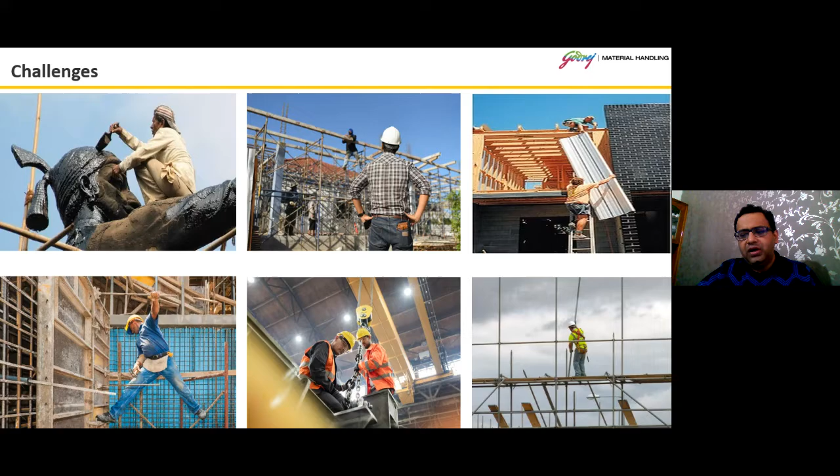People also use ladders, scaffoldings, and even material handling equipment to work at particular heights. Are ladders and scaffoldings safe? They are safe at particular heights, but they should be geared with particular safety guards when working at heights greater than 7 to 8 meters.

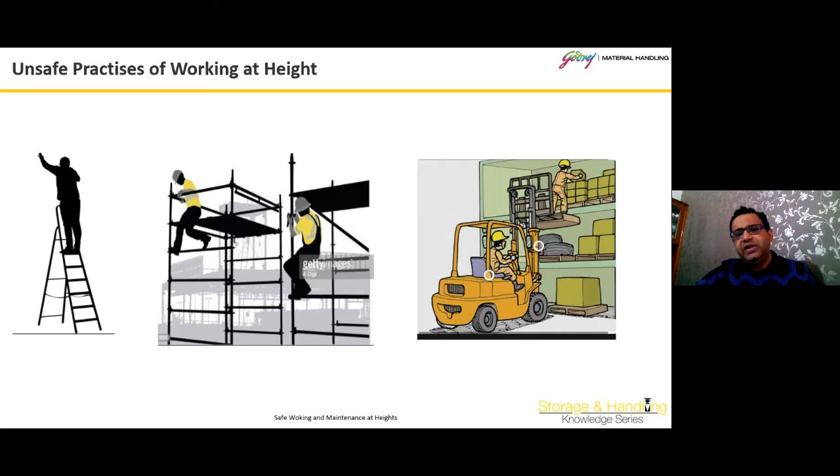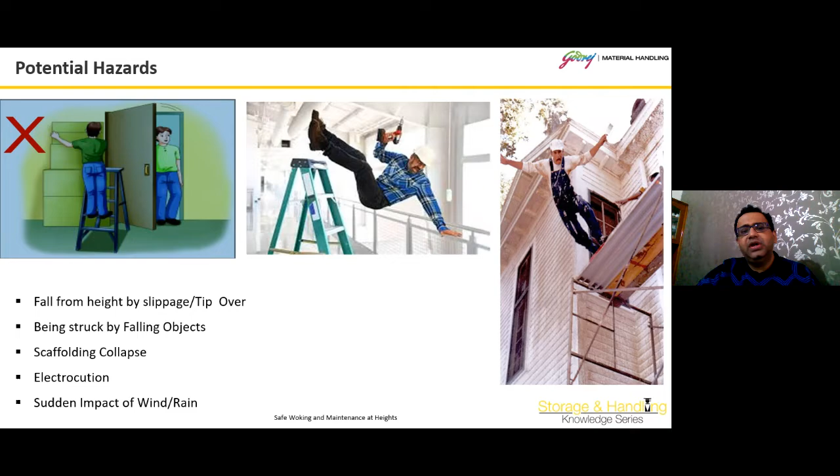What are the potential hazards? A ladder is safe, and scaffolding is also safe, but does it have potential hazards, and are there better ways of doing work at height? When working on a ladder, there is no control for the person working at that height, and similarly for scaffolding. There are chances, and it has happened, that people working on ladders or scaffoldings have fallen, or the scaffolding has collapsed, or there is slippage, because these don't have safety features ensuring the people working at those heights are safe.

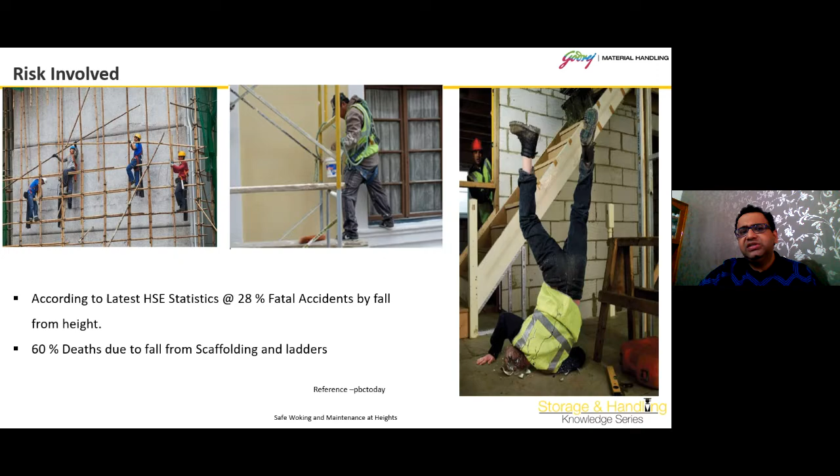There are many risks involved, and a global report says that 28% of fatal accidents happen when people are falling from heights, and most of them occur when working on ladders and scaffoldings. So though it's a very common visual to see people working on scaffoldings, there are much better ways to do the work at those heights.

As the material handling industry came on, people started moving loads at particular heights, and a lot of factories and warehouses are using material handling equipment. But material handling equipment is meant for handling material, not man. It is being used as a cage and people feel they are safe. I won't name companies, but even some of our own customers have used it and had very bad experiences, because material handling equipment is designed at a particular height with stability keeping center of gravity in mind. But when a person working at height moves in and around the cage, the stability of the truck comes at risk.

I'll run a short video to show what happens, shown in the right hand corner.

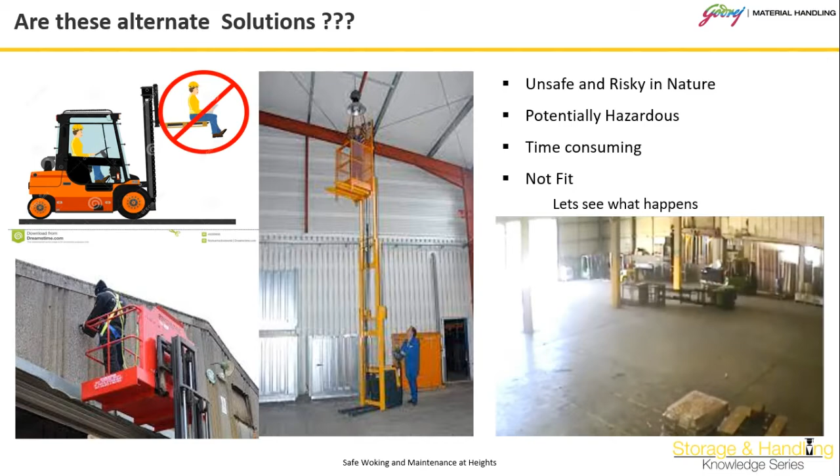This is a forklift truck. The balance, or center of gravity, got off because the speed at which the forklift was running is not recommended when working at height. Fortunately the person is saved, but it's a very risky proposition.

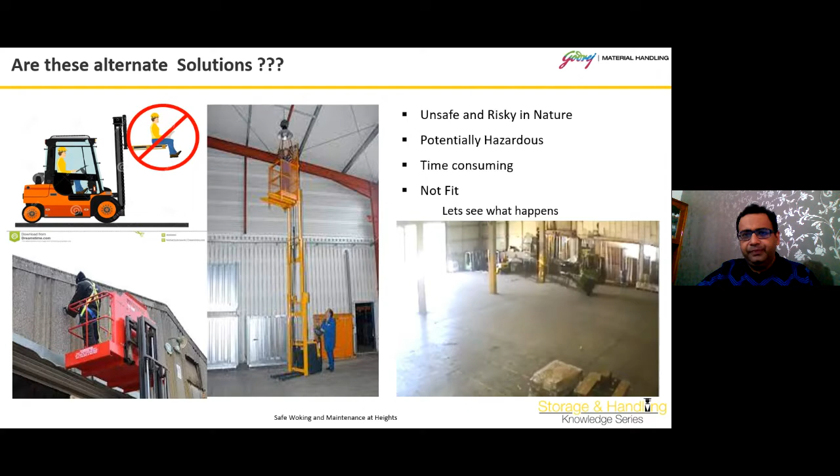So we should not use any material handling equipment while putting a person on top. Is there any alternative? We did one study, and I'll play a small video showing how traditional people work and what solution is available. The first video asks, is there any life without power tools?

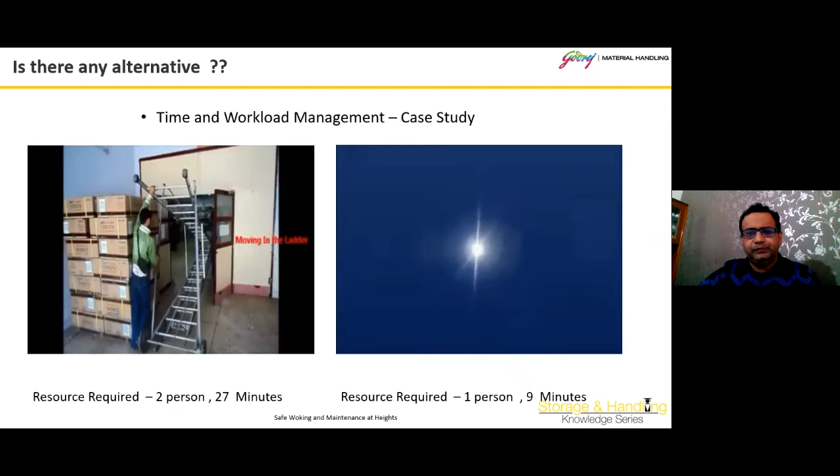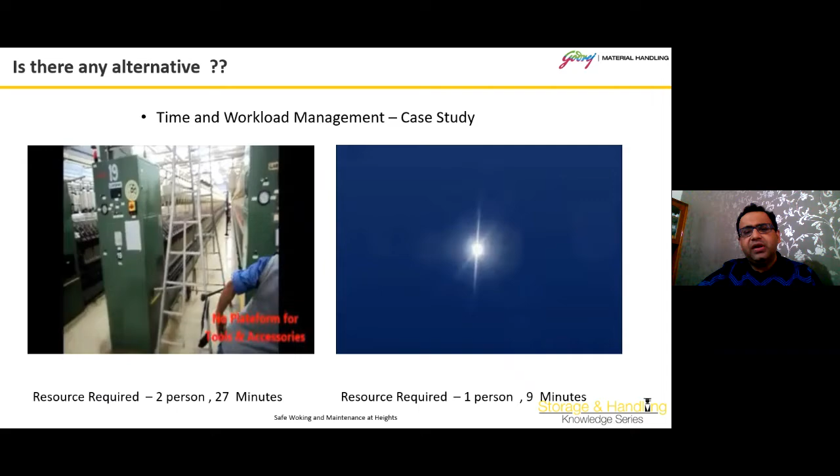This shows how people traditionally do the same work. You can see two people trying to put up a ladder, because the size of the ladder is fixed and the space is a constraint, and they are trying to change a tube light at the top.

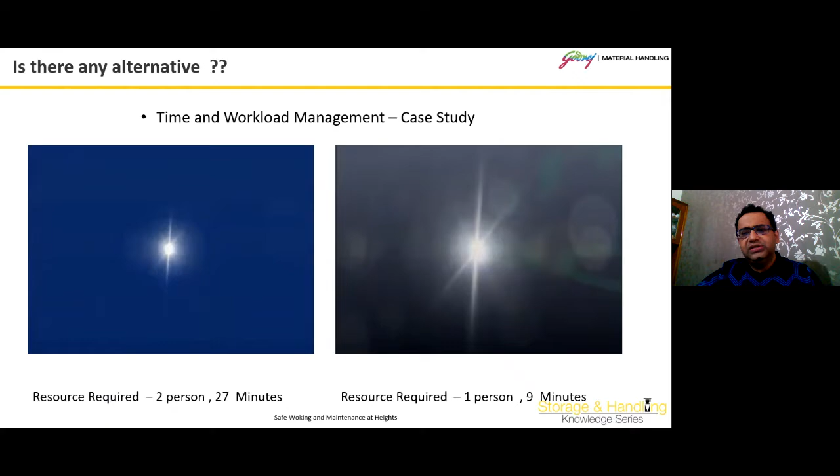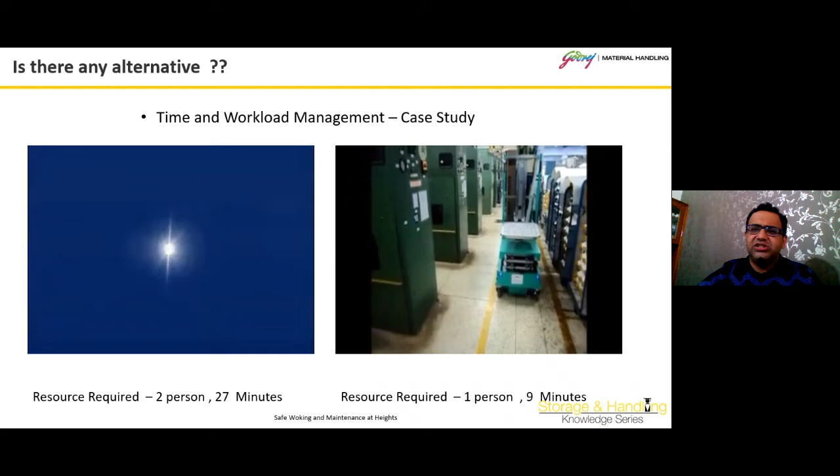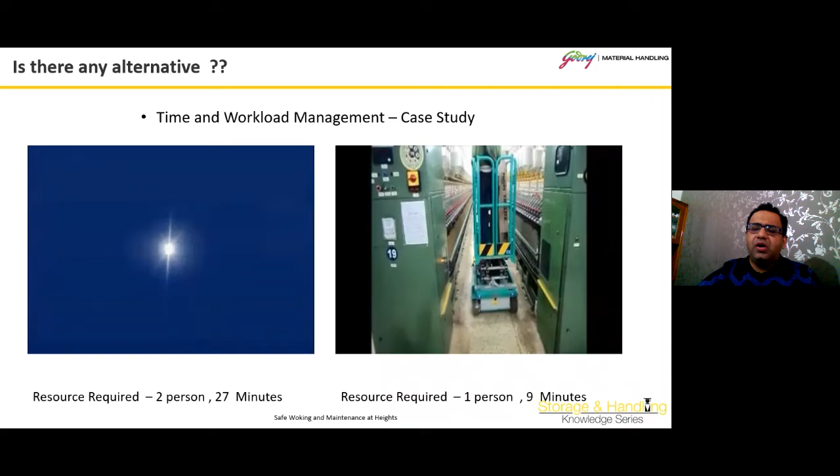Second, we have equipment doing the same job. Instead of two people, one person is working, and the time required is one-third, with full safety. You can see how small the aisle is, and they are still able to go to a particular height and do the work.

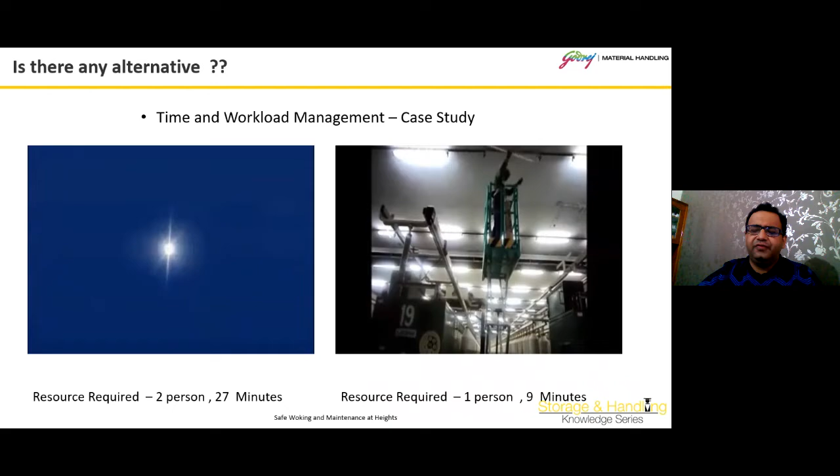This helps increase productivity with less manpower and increased safety at a factory location.

Going forward, we will talk about the different aerial work platforms. All this equipment is called aerial work platforms, some also called scissor lifts or boom lifts, but broadly classified as aerial work platforms. They come as mast, they can go up through scissors, and they're also classified as booms and as crawlers. Over this presentation, we'll go through, at a broad level, what these types of equipment are and what safety features are available.

First we talk about mast. It can come as a single mast or double mast.

Depending upon the mast, single or double, the capability of equipment taking one or two persons is available. It can be AC powered or battery operated. When you are moving up, either it is sourced through an AC socket or a battery fitted into the equipment, and it can go up to 16 meters. These are lightweight manual equipment, and you can transport from one location to another with the help of one or two people.

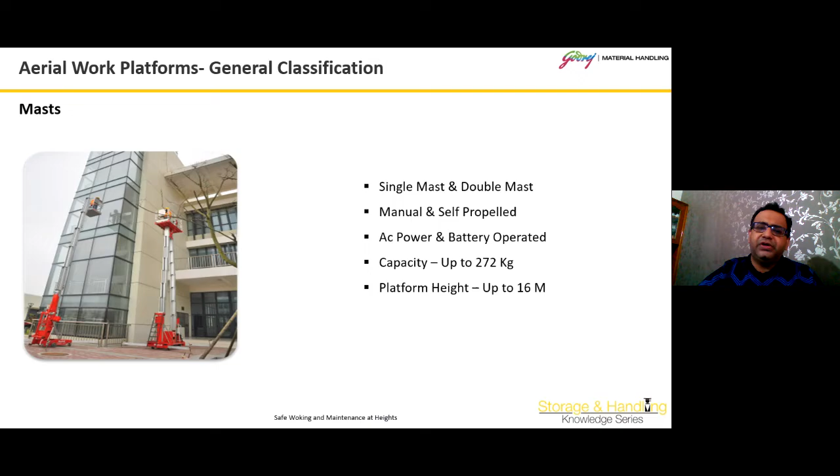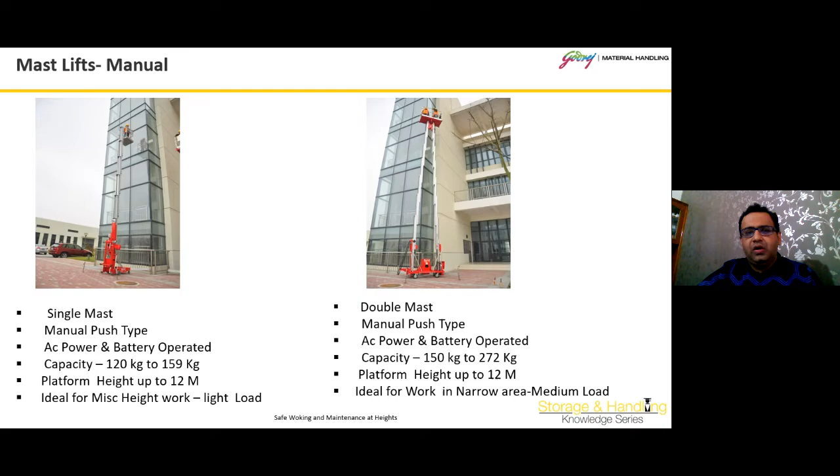This is the simplest form of aerial work platforms available. As I said, we have two types, single and double. The capacity varies because if you're taking two people, the machine should have capacity to take two people on top, plus these machines have outriggers to stabilize the machine at the platform. For these type of machines, you need a flat surface so the equipment can be stored such that when people are moving up, there is no movement on the machine. That's why it has outriggers on the four sides of the equipment.

You have an articulated boom as well as a straight boom. If the working height is at a place you can reach directly, people generally use either a mast or a scissor lift. But if there's a situation where you can't reach directly to the location, then we use an outreach or articulated boom in order to reach that particular height. These are the two self-propelled masts which come in this category.

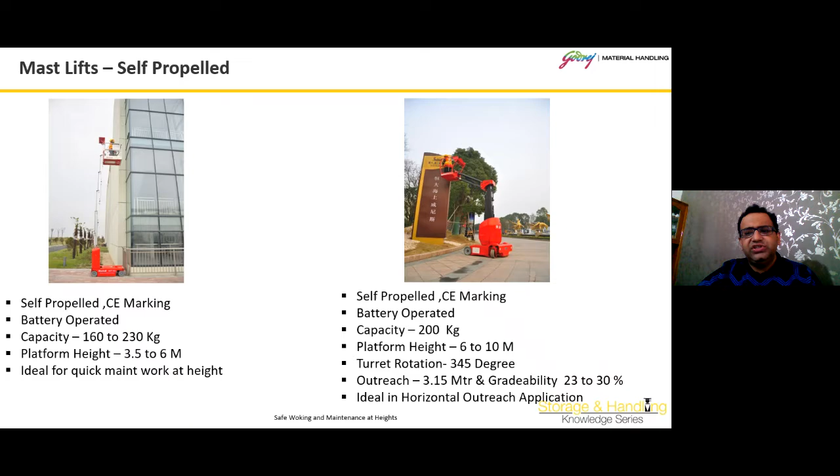Then comes the scissors. Scissors again are available manual and self-propelled, and the power to go on top is either through battery or AC power. These equipment work on flat surfaces, and are also available for construction sites with rough terrain capability. Depending upon the application, you have different heights and different capacities.

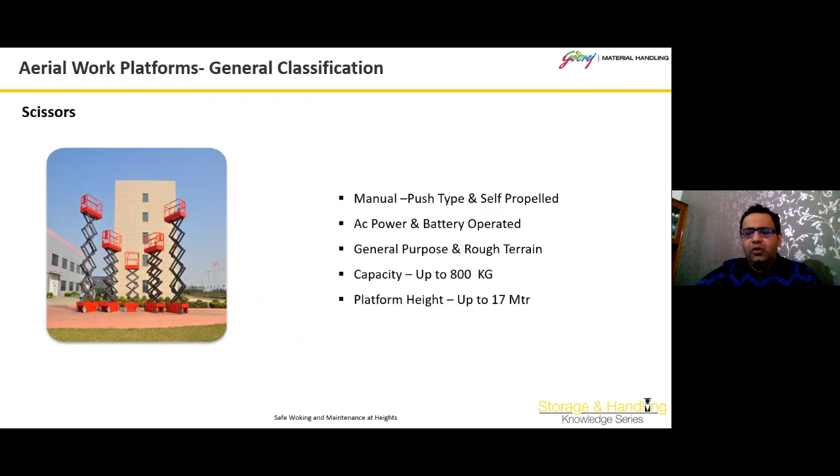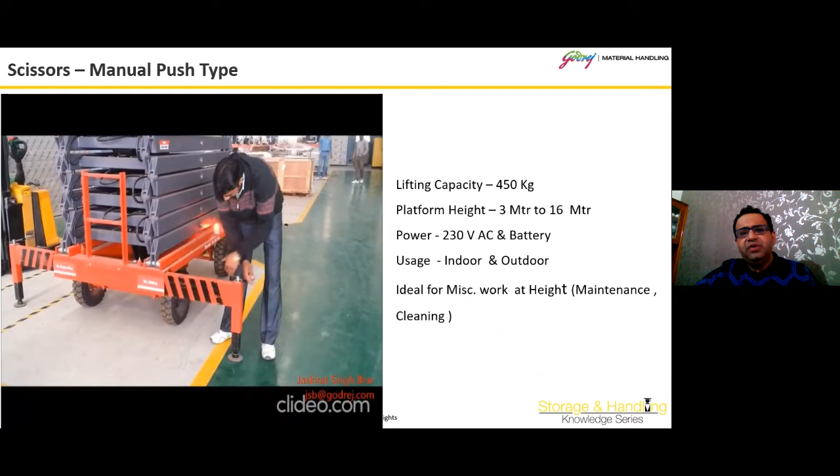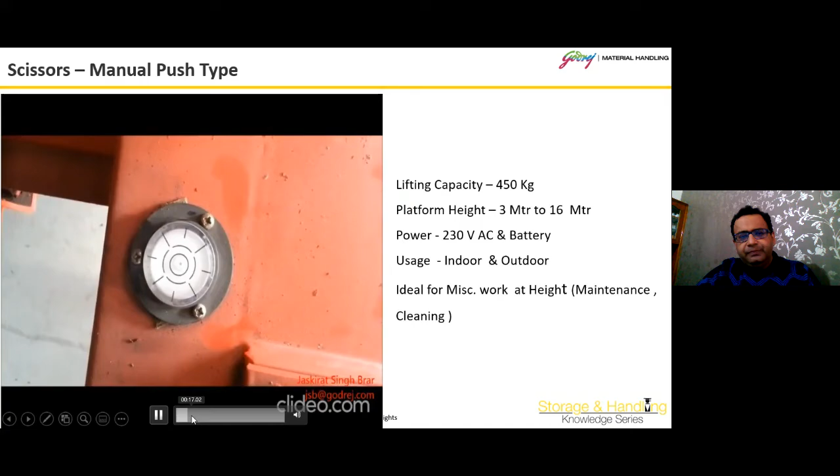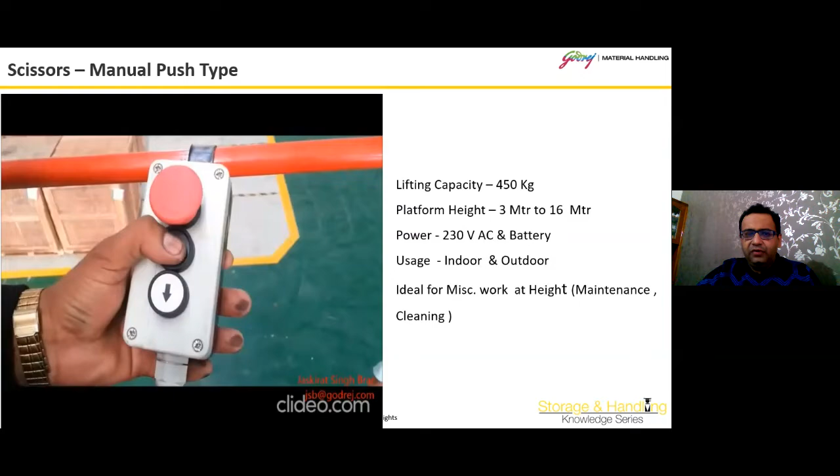In scissor lifts, as I mentioned, there's manual as well as battery operated machines. With a manual machine, you have outriggers. If you see in the video, the person is putting up the outriggers to stabilize the machine. Once done, he moves up. This is a level indicator showing the machine is stable, then it goes up. The controls of the machine are available with the operator in the basket, and in emergency it can be controlled from the machine on the downward side too. It has a simple drive of going up and going down.

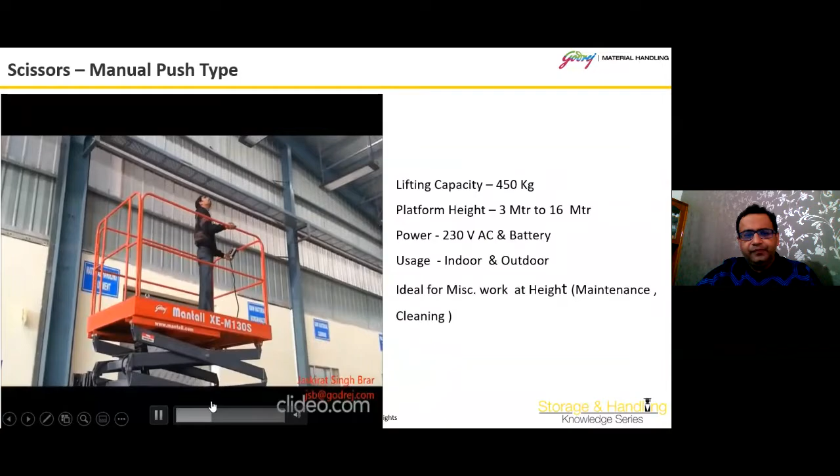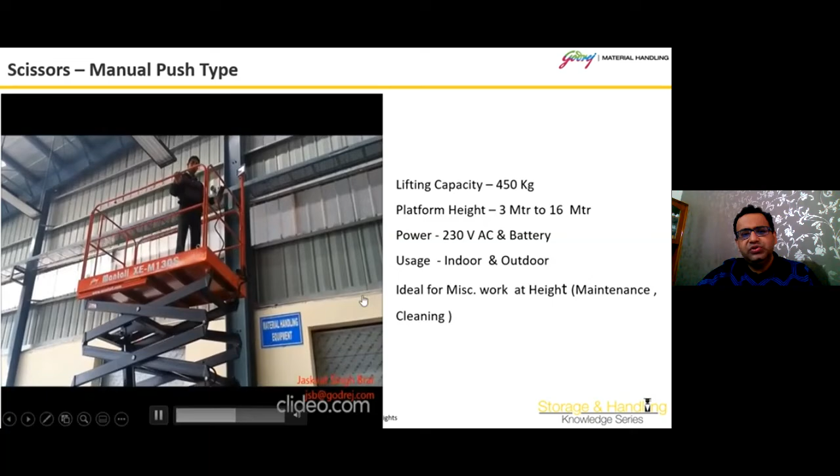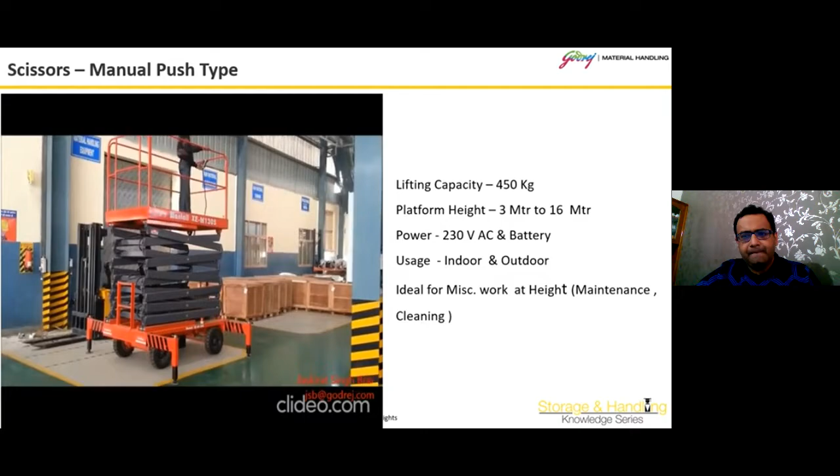You can see the movement of the scissors is very slow as it goes to the top. The control is in the hand of the person going up, and similarly he comes down by pressing a button on the downside. These machines can be used for cleaning and maintenance at workplaces.

Then there are self-propelled machines. Again, the height and capacities vary. Generally when someone buys a machine, it's assumed it can be used in internal as well as external environments, but that's not the case, because machines made for indoors have limited capacity to withstand winds. Machines meant for outdoor use have better resistance towards the winds. So one should be absolutely clear when purchasing the machine whether it's to be used for outdoor or indoor. There are certain machines basically meant for outdoor that can be used indoor as well as outdoor. These machines can be used for maintenance work, cleaning work, and even cycle counting in the warehouses.

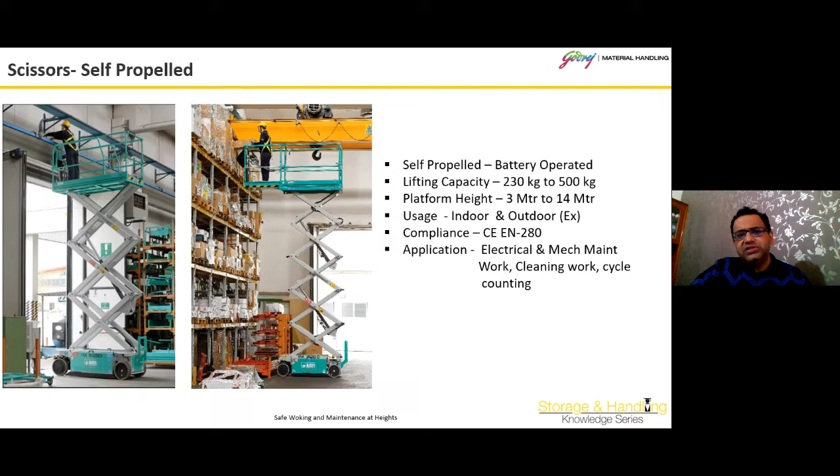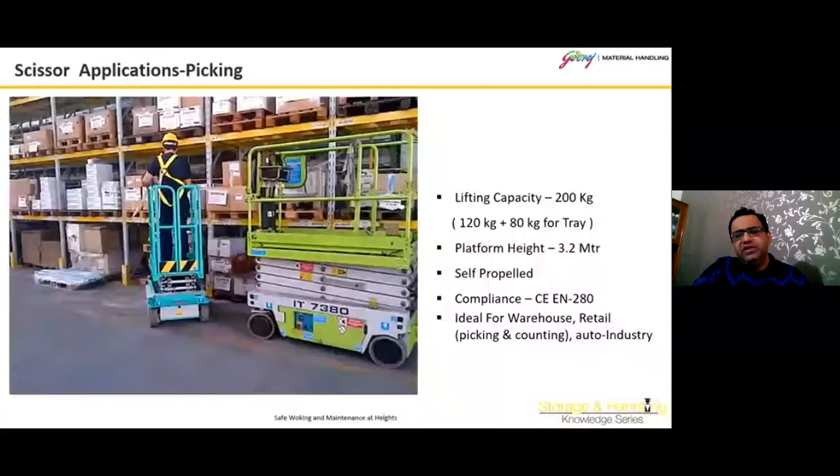In a similar category, there is a machine that can also be used for picking. You can see a small video of how this person in a spare parts division goes up on the machine, picking up the material from the rack, and putting it down.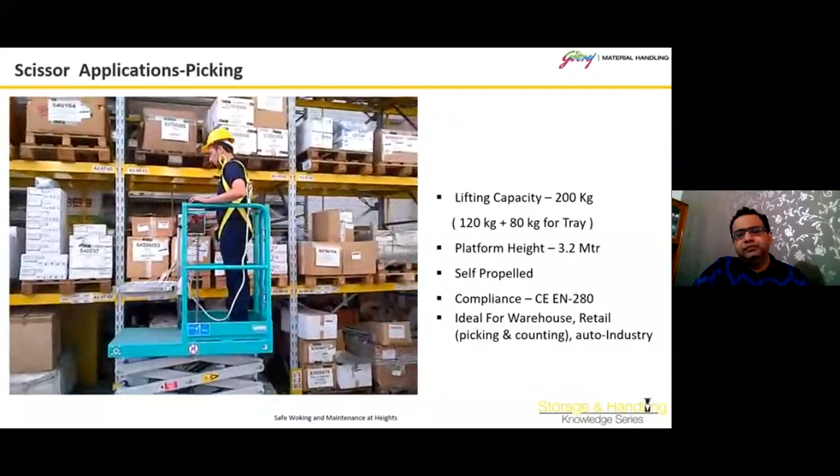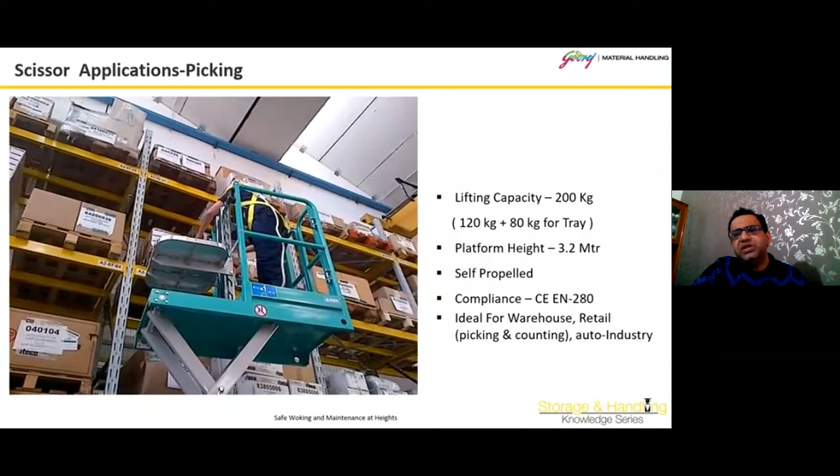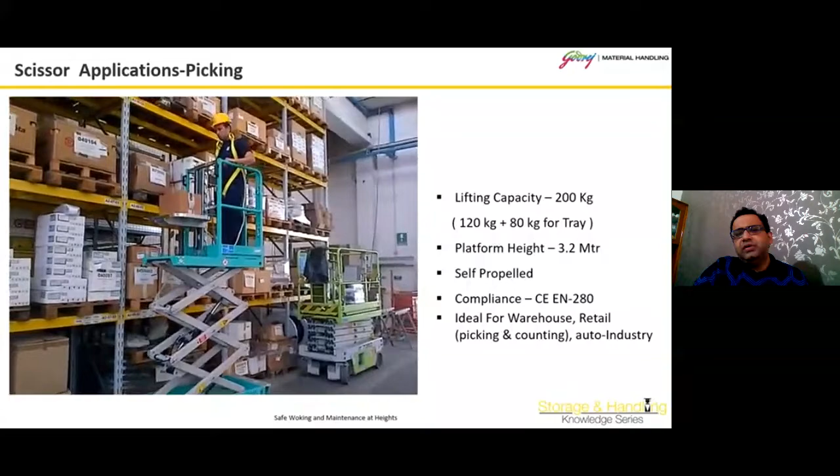So the capacity of this machine is about 200 kgs. Taking into consideration the weight of the person up to 120 kg, the tray is made for 80 kg. So this can be used as a multi-purpose machine for order picking, as well as for cycle counting, as well as for maintenance work.

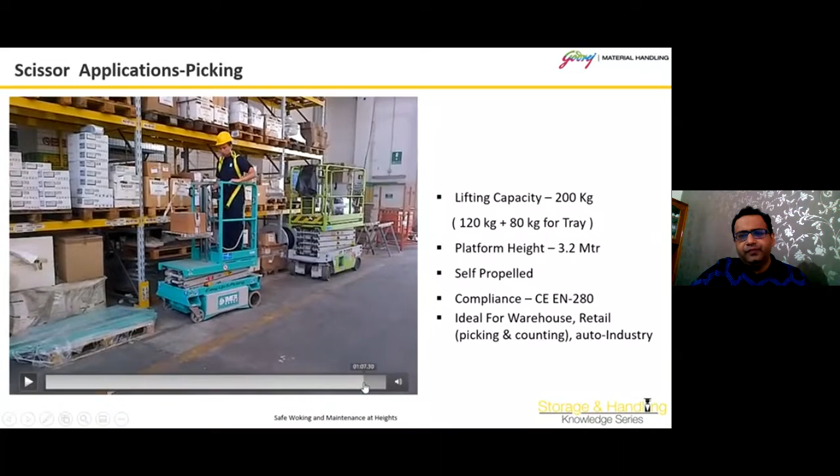So now this person is moving and he will put the material to the other rack. So now in the scissor application, what you have seen is that when the person is going on the top, he can move along the side of the machine.

But there are machines available where you can go parallel to the basket, which helps you to work in the warehouses, because in the warehouses it's not very convenient to have very long aisles where you can work along the length of the scissors. So this particular scissor lift helps you to work in very narrow aisles, and it can go up to 12 meters depending upon the width and the capacity required. So this is a very common application for warehouses.

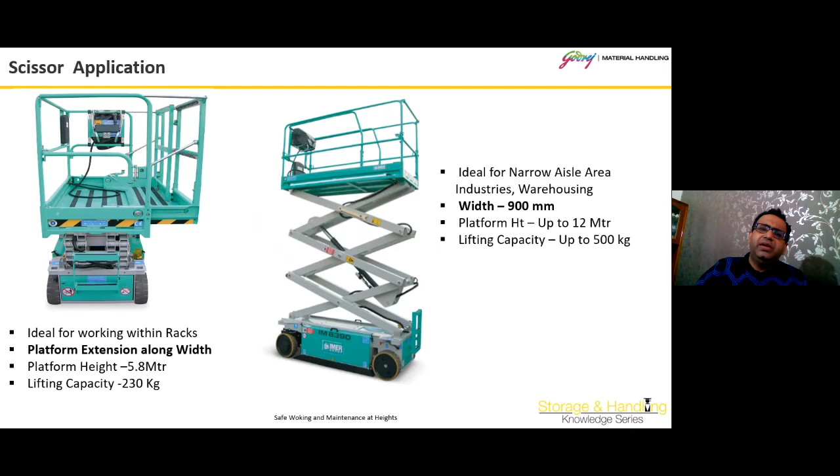Then you have rough terrain scissor applications which are used for construction sites. These machines have rough terrain capability, plus they have a high capacity up to 800 kgs, and they can be used from both the sides. The extension happens on both the sides for these machines, so that when you're working on a construction site, you don't want to move the machine again and again.

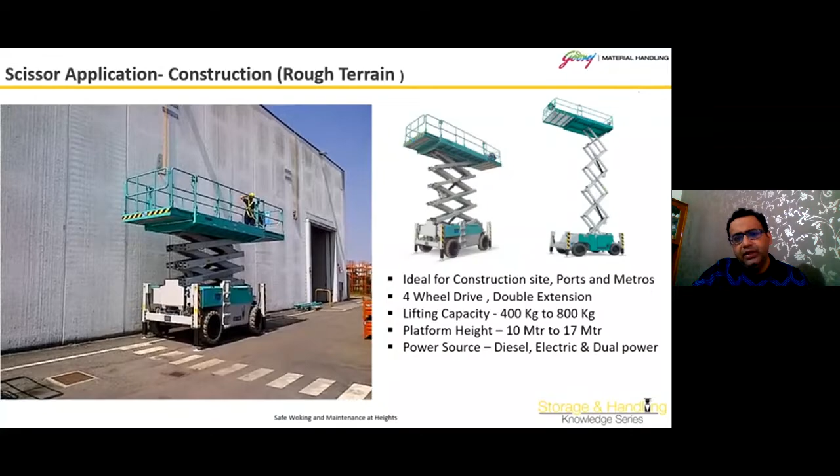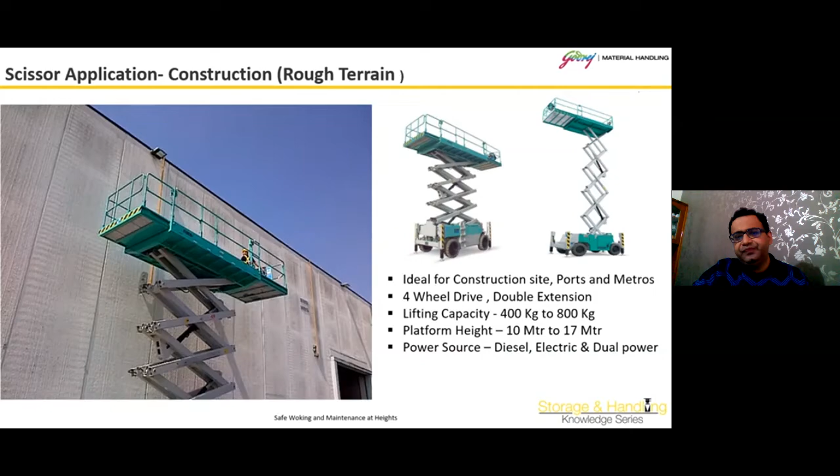So these are very rugged, strong machines, and as the video shows, it's working outside, and in the event if something happens, that gives enough time for a person to come down, and the machine will stop the work.

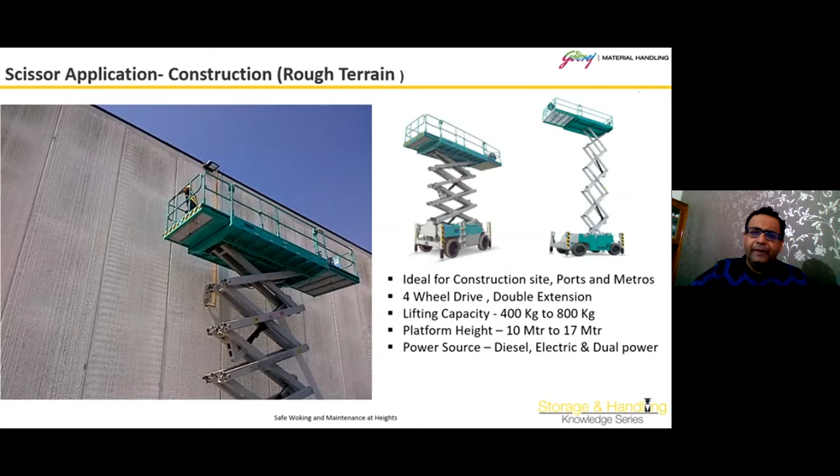Then from scissors, we are moving to boom lifts. Boom lifts are again divided into two types: one is an articulated boom lift, and the other is a telescopic boom lift. When we say telescopic boom lift, the boom comes from one location and moves directly towards its destination, so it's a single piece. But when we say articulated boom lift, it can articulate so that it requires less space in order to reach a particular location where a person needs to do the maintenance work.

Again, the controls of the machine are available with the operator who is working at a particular height, as well as in an emergency, if something happens, the basket can be brought down to the stored condition from the machine itself. If you see, it is available up to 40 meters, and it can carry one person or two persons for doing the job.

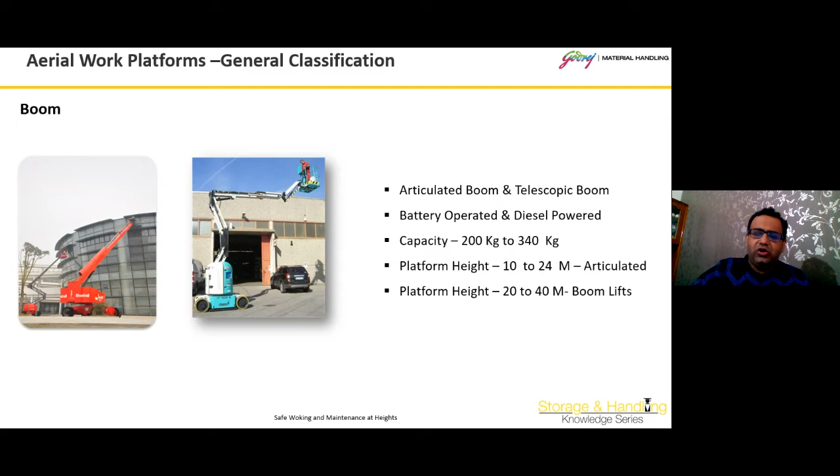Now in this particular machine, the reach is also very important, because you want to go to a particular height, plus you want to reach. So when there is any obstruction for doing maintenance work where the scissors can't go, this is the best option, to do maintenance work where you can't approach directly.

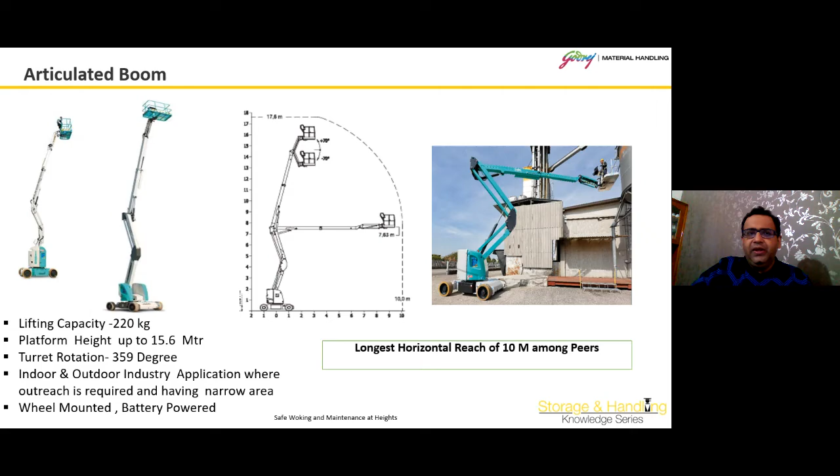And these turrets can rotate, and all the functionalities of the machine are in the hands of the operator. Even the basket, you can move plus and minus 70 degrees, and the level of the platform when you're operating always remains parallel, so that there is no adjustment required. So that is again a safety feature in this particular equipment, that you don't need to adjust your basket. It is done automatically.

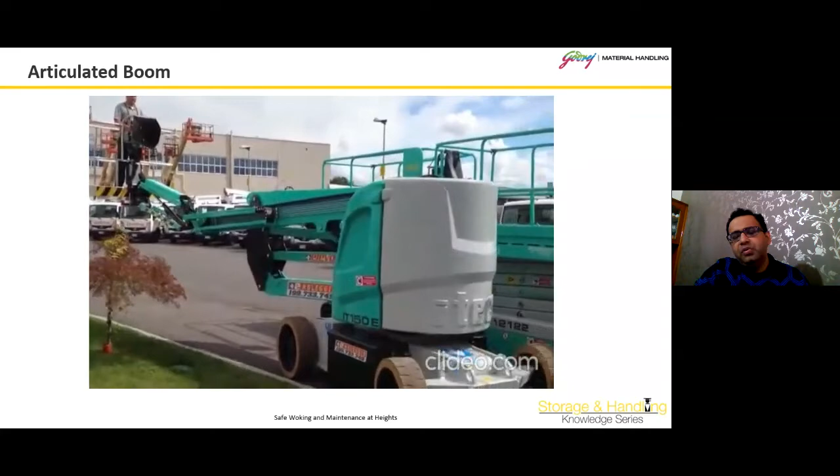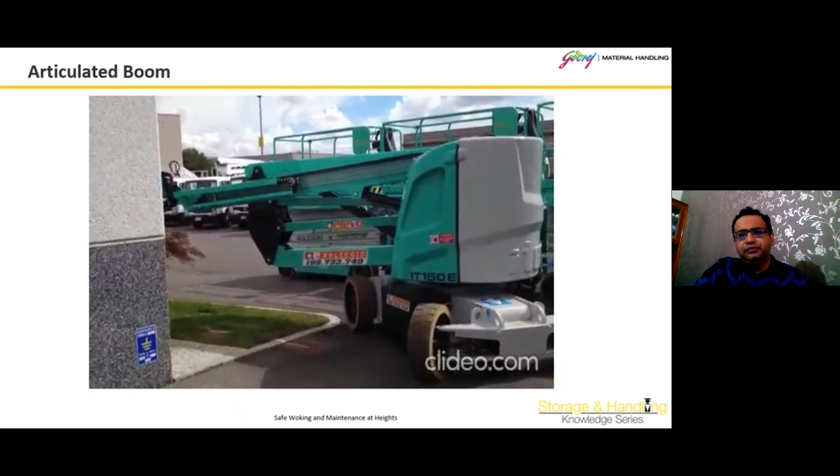So this is a small video. It will show how in a very compact space these machines can work and can go up to 18 meters in reach. So it can turn in a very tight radius.

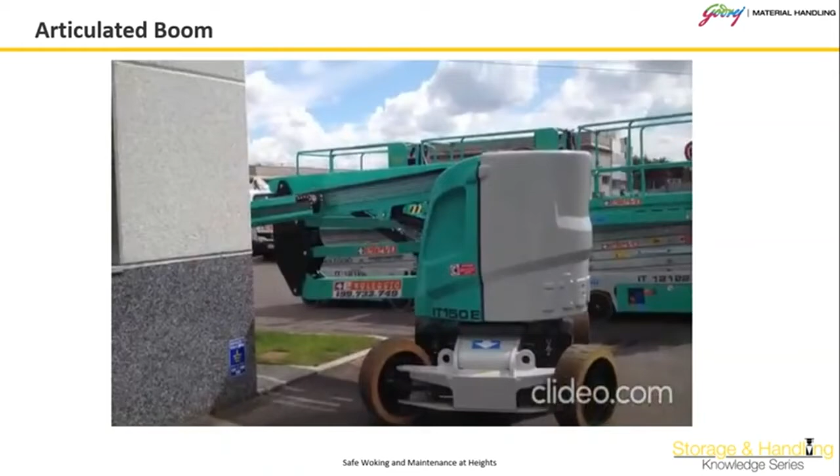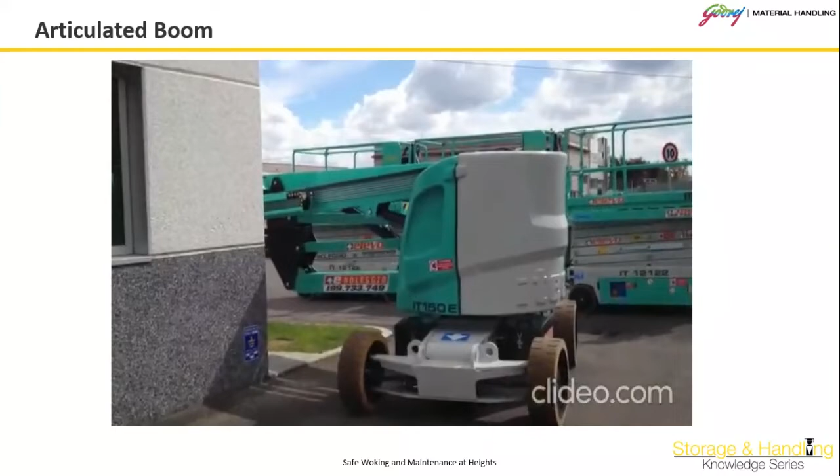Now the person is taking it to the top, and he will adjust his position depending upon where it has to work.

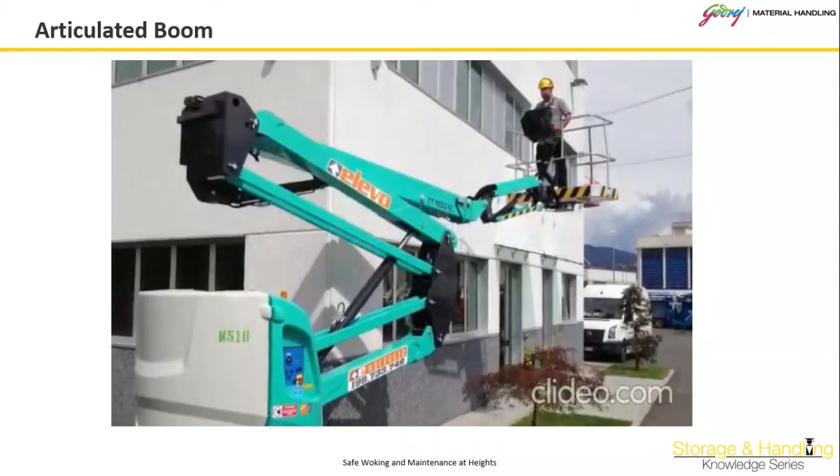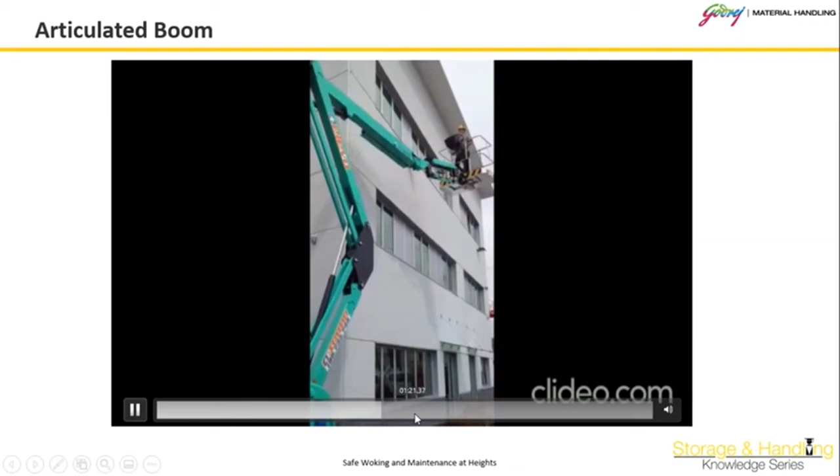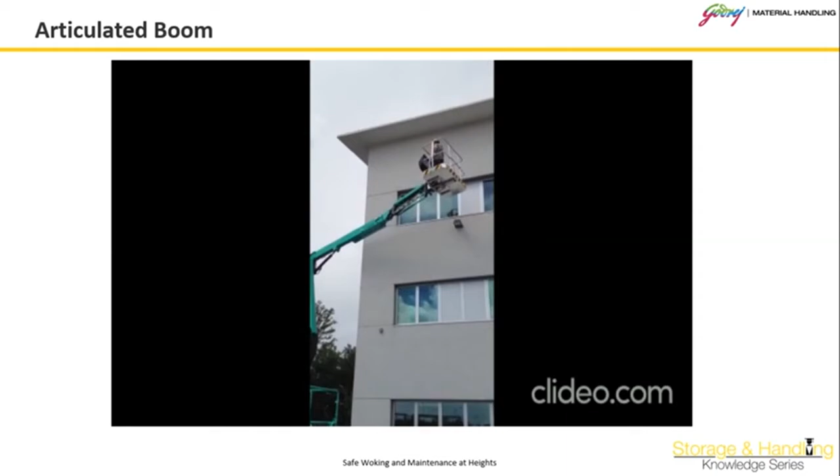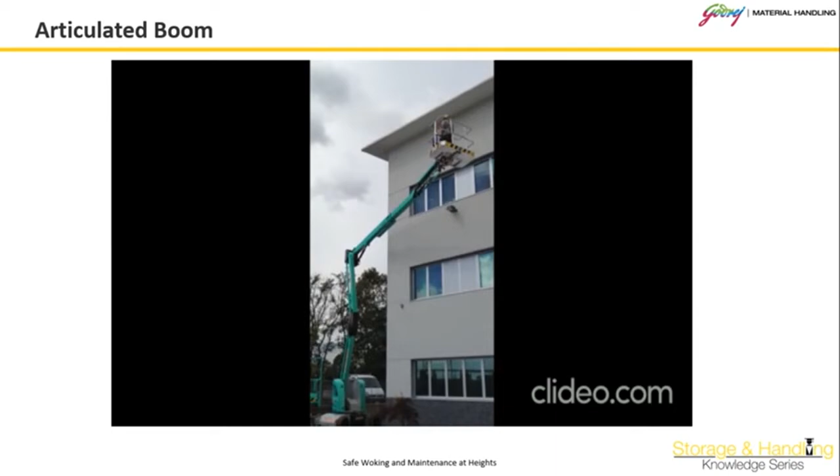So this is very apt equipment for outdoor maintenance at your works, and in all these machines you can also take certain tools, welding tools and maintenance tools, and it can be used while working at heights. And when you're working, you can even move the machine. There is no need that you have to come back to the stored condition before you can operate the machine.

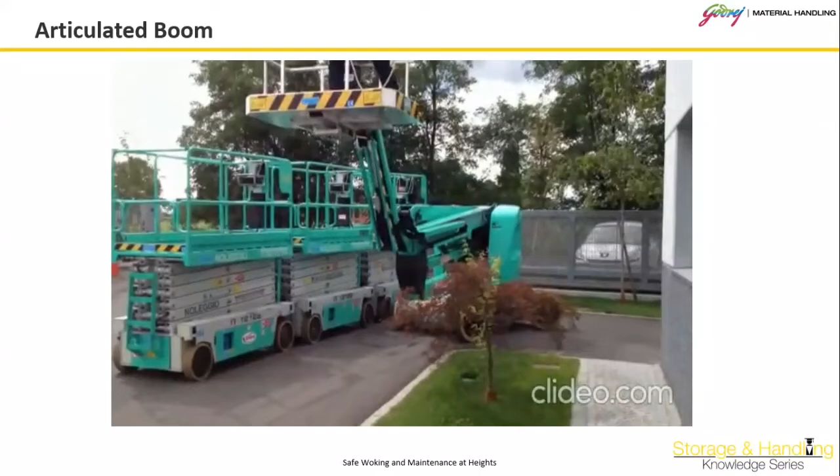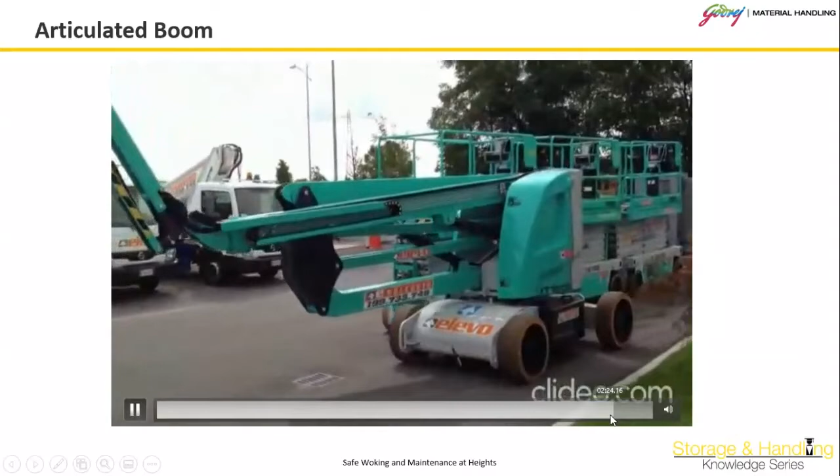So this is about the articulated boom lift. Then comes the crawlers. So when you are working at heights, it is not always possible that you have surfaces which are solid and even.

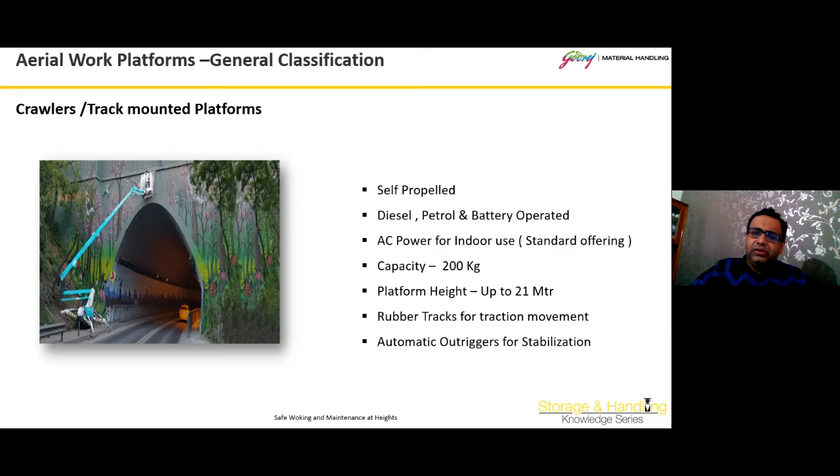So it is available with rubber as well as metallic crawlers. This can be used, and you might have seen it used widely in institutes for both indoor and outdoor usage.

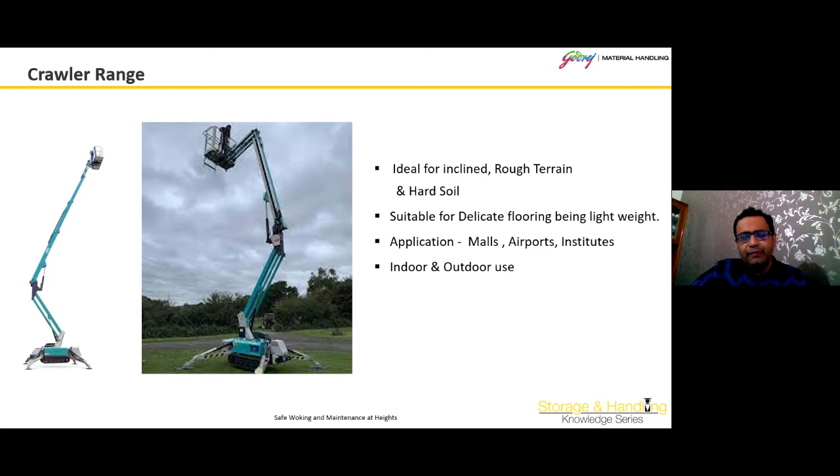Now coming to the safety features. We have seen the broad classification: mast type, scissors, articulated, and crawlers. When working at a height, it's very important that all these equipment are safe, so all these machines have overload protection. If a machine has a capacity of 200 or 220 kgs, it will not allow a person to exceed it, giving a trigger that you've reached a particular level and the machine won't move further. Depending on the standards, some only alarm the operator, while others stop the machine entirely, and the operator cannot overrule that safety feature.

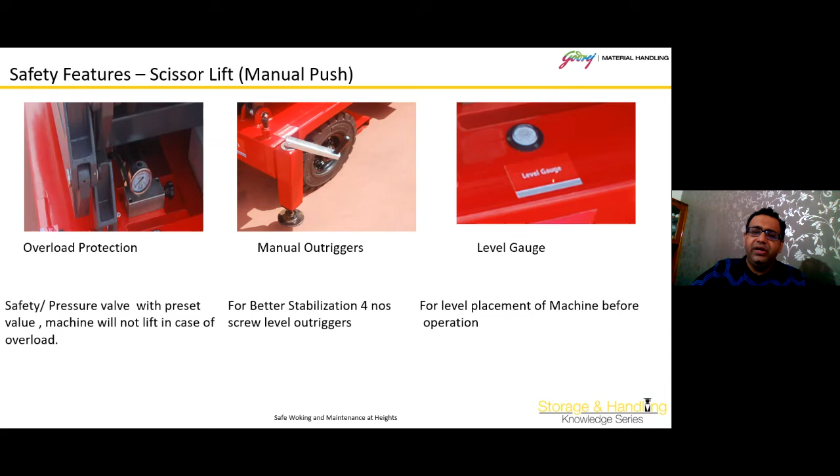You also have outriggers and a level gauge so you can see yourself whether the machine is properly stored or not. Then in case of any eventuality, if the machine gets stuck or something happens, there is an emergency lowering button available for stopping the machine and bringing the person down to ground level.

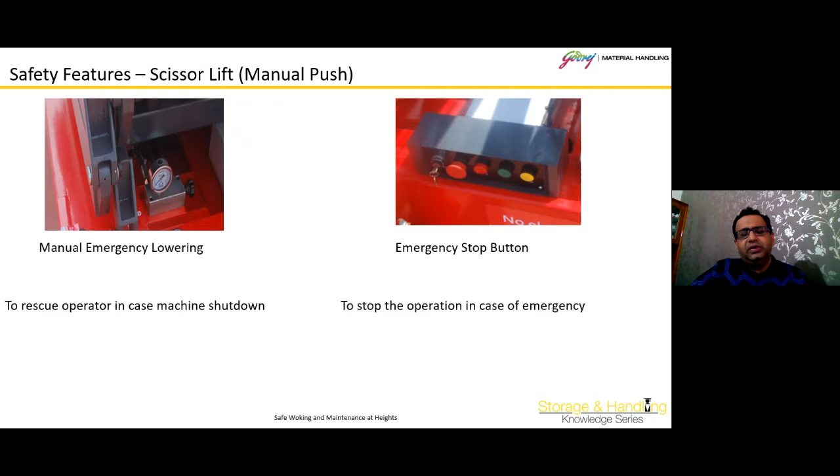When we go to scissors, there is scissor protection. In an eventuality when a person is coming down, if someone is standing near the scissor, it gives an alarm so that there is no shearing of body parts if someone is standing nearby and is not aware that something is happening at a particular height.

Then you have pothole protection, so that if there are any small holes or potholes in a floor, it gives stability to the machine and prevents issues from any ducts on the ground. This basically adds safety while working at heights of 40 meters and 60 meters.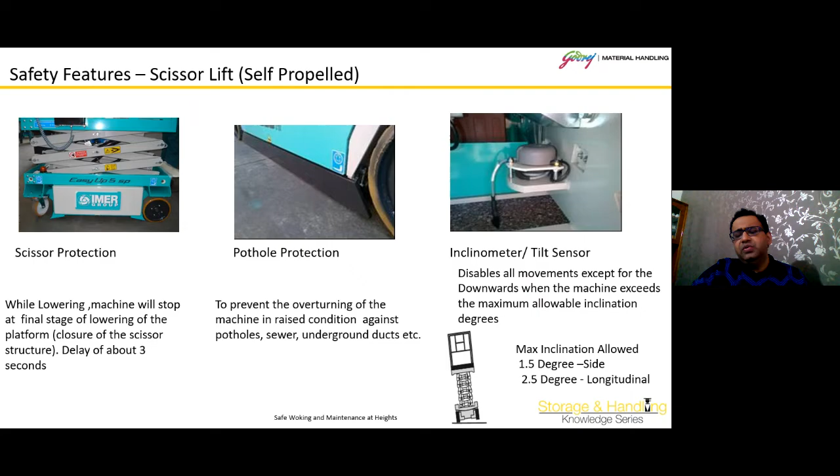There is also an inclinometer, because these machines cannot take too much of a gradient. If you're working on a floor with an inclination and it reaches a particular level, the machine will not move up. You can only descend, not move up, because moving up would change the center of gravity and create a possibility of an accident. So in these machines, you don't go up, you can only come down. This is a very important safety feature.

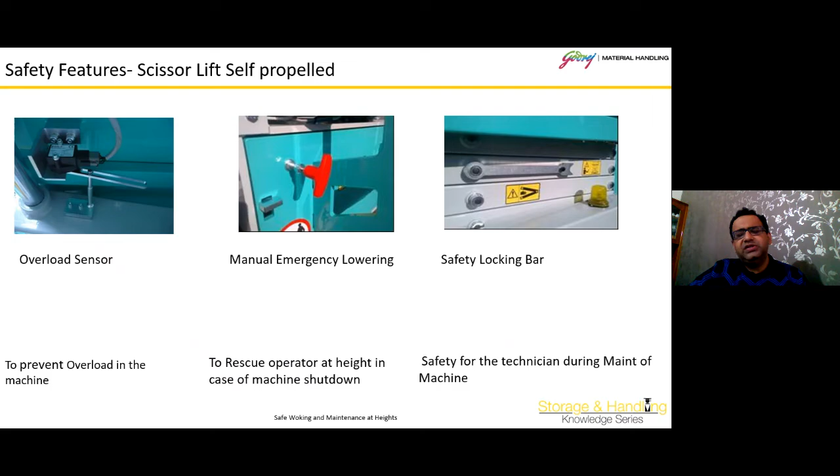So again, all these machines, as I mentioned, in manual and mast types have overload sensors. Similarly, in scissors also you have overload sensors and emergency lowering. All these safety features help ensure that the person working at a particular height is safe and working with productivity and efficiency.

When working, in order to get the machine into narrow places, you have guide rails which can be folded down so that you can take the machine through narrow doorways. Plus, when working at a height, there is anti-slip flooring available so the person has proper traction with the floor so that nothing goes wrong.

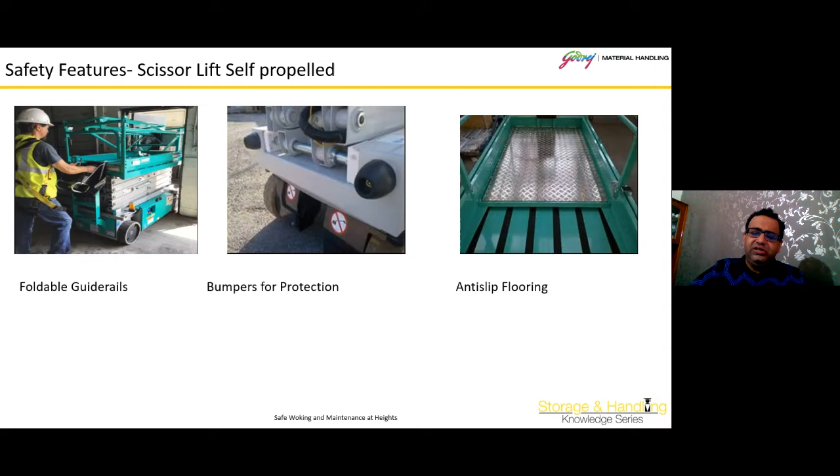There is also protection so that if there's any obstruction, it doesn't harm the machine, with a protective covering for that. Another important thing is that since these machines are battery operated as well as AC powered, when working at a height and tracking the machine, the speed reduces drastically. This is a very important safety feature required so the machine doesn't run at very high speed.

If the machine's battery is on charging, you can't use the machine. There had been certain instances where the machine was put on battery charging and people started the machine, and something happened. So it has now become a safety feature that when it's on charging, it should not move.

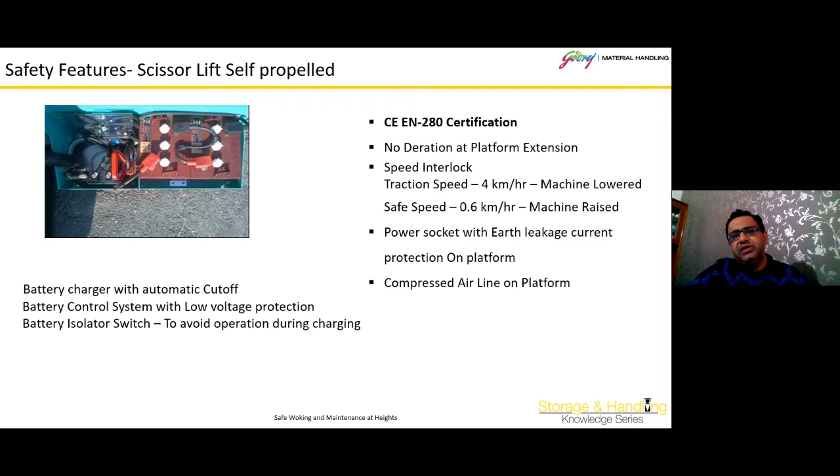Again, in the boom lift, you have a load sensor, and as I mentioned, there is automatic cutoff in the batteries. Even if there is low voltage in the machine and the battery goes down, there is a provision available so that one can still come down.

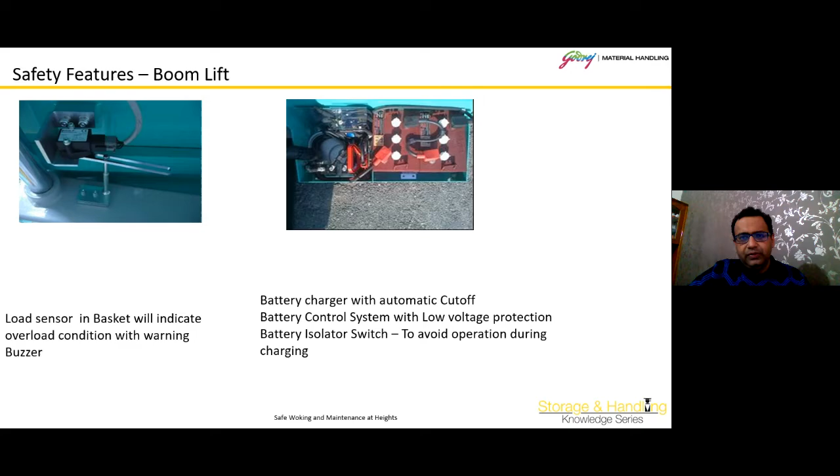So in the crawler, there is protection to the engine and protection to all the components, because when working at height, it's possible that something can go wrong and hit the machine. All the outriggers on the crawlers are automatic, so once you put the machine into use, until the outriggers confirm that the equipment is properly stabilized, it will not allow upward movement of the equipment.

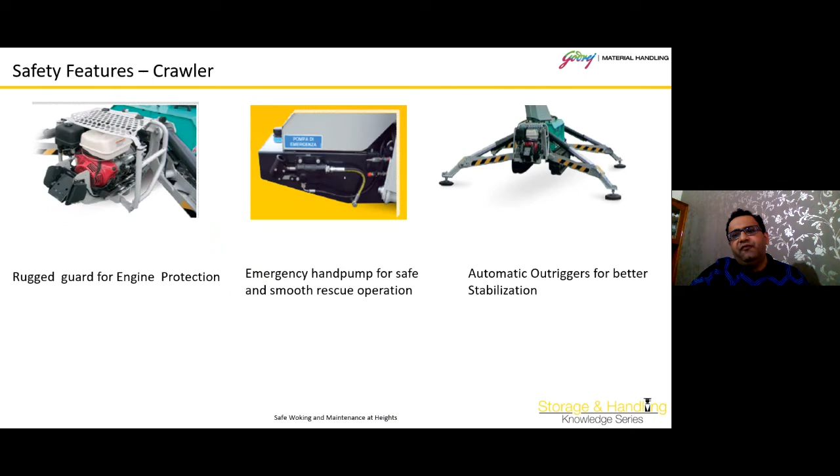So these crawlers can move in 360-degree rotation, and it is available on rubber as well, and it can move into narrow aisles. These are mainly used in stadiums and hotels where you don't want to spoil the floors while working with this equipment.

Because the boom lift, what I mentioned earlier, they are very heavy weight. One can weigh up to 6 to 8 tons, but these machines are comparatively one-third the weight of those machines.

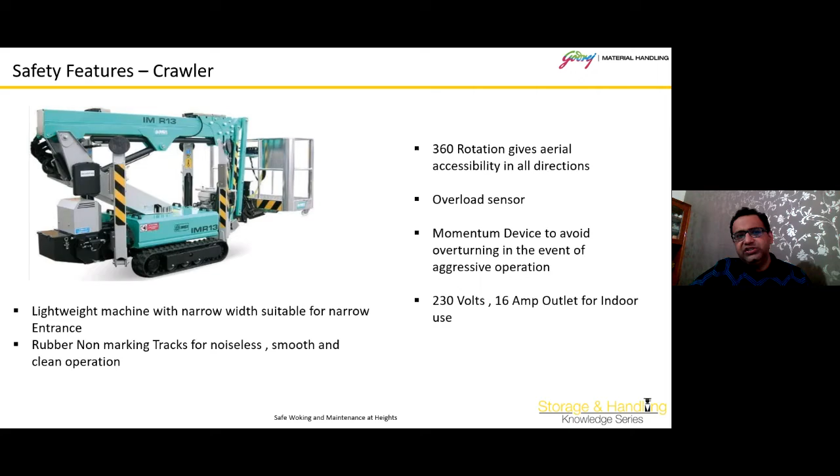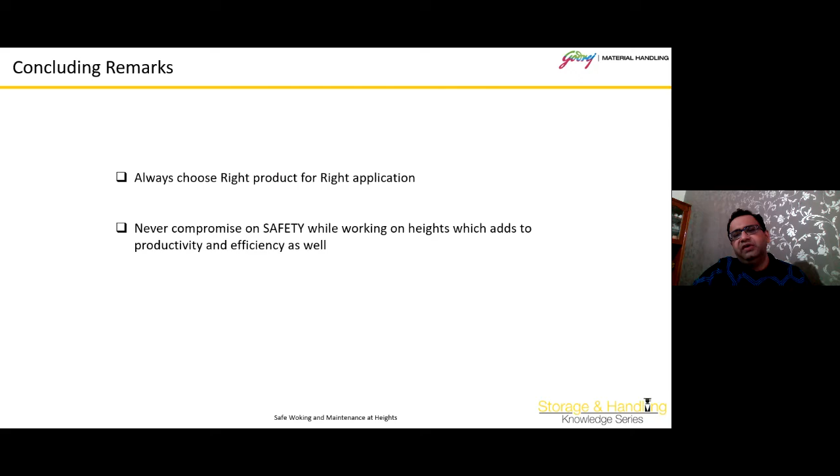So what I would say at the end is that we should always choose the right product for the right application. Though we have showcased different products that are available, depending upon the requirement and the heights, one should never compromise on safety while working at heights, because it not only adds to safety, but also to productivity and efficiency.